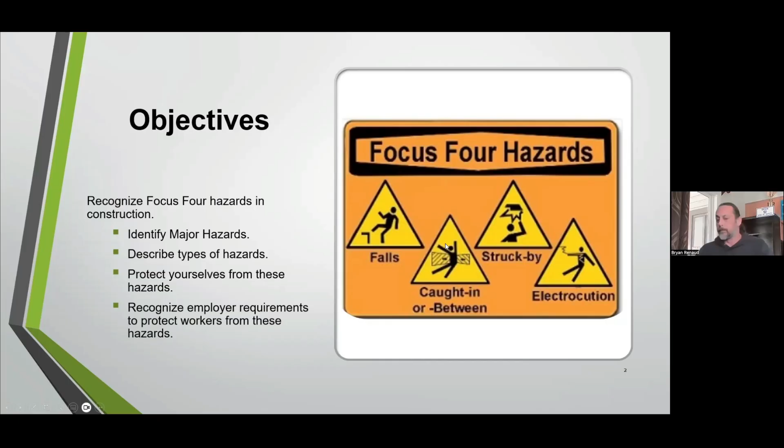Quite frankly, we have these things called emphasis programs that we try to connect to the industry in regard to these major hazards. And we got 1, 2, 3, 4. Okay, at least we got fives. 6 out of 30, guys driving. That's cool.

To address these, and it's interesting because we've been working on this Stop Falls Save Lives since 2012 across the nation. You would imagine that with over a decade of hammering the message, you might have some significant impact on that hazard or condition.

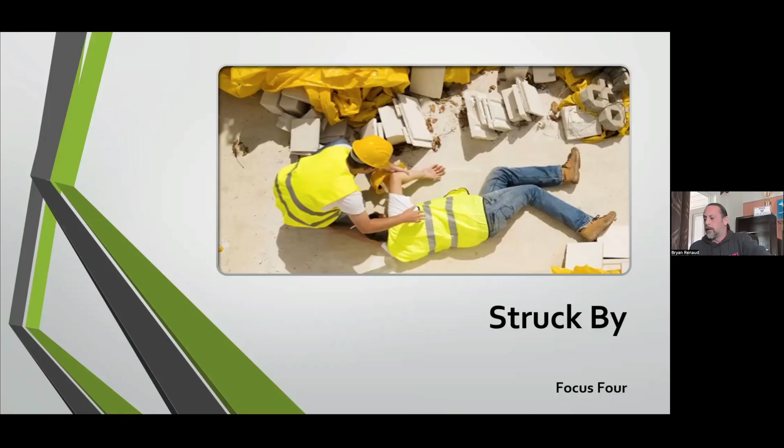To that note - no, we'll get to it when we get to the fall protection, because the way this presentation is set up, we're going to deal with each one of the Focus Four separately and kind of illuminate the hazards specifically, some of the regulations that are behind it as well.

Generally speaking, as I was saying, what is this? This is struck by? Again, being so difficult sometimes to discern. Struck by collapsing product, equipment, or materials - whether we want to call it struck by or whether we want to call it crushed by.

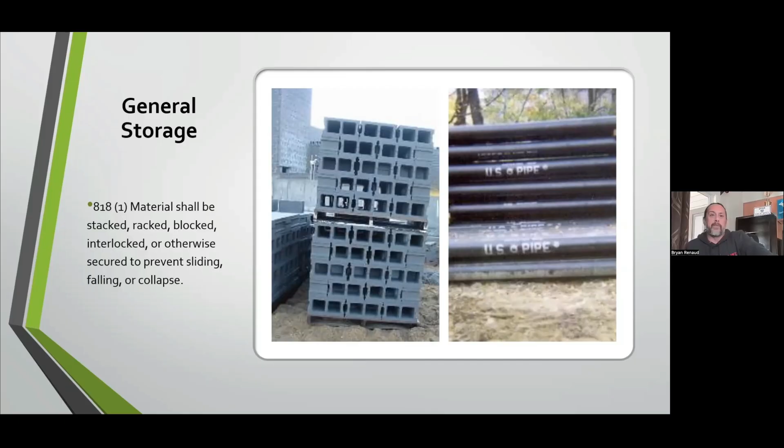Some fact is we have rules that talk somewhat ambiguously, unfortunately. Some of these rules talk about how do you properly store some of these materials. It says stack, rack - whether it be pipe, whether it be block or brick material. Typically, as a rule of thumb, it's a lot more specific depending upon how the material is stacked, and then literally how it's banded and/or stacked.

That's not me, is it? No, it's not, it's Neil. I'll put him on mute. Could be me. Oh yeah, that's you.

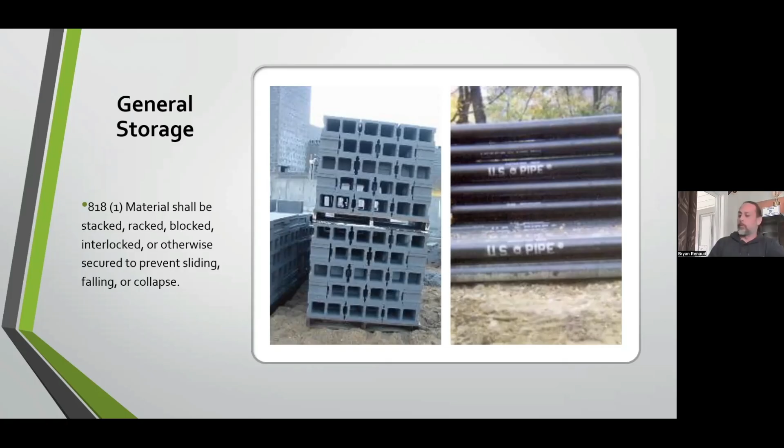So, struck by lightning, what is that? I don't get that. It's a joke, I don't know. Whether they be banded by plastic wrap and such like that. Rule of thumb: two pallets high, no higher.

Rigging equipment, slings, this variety. We're talking about rigging equipment, whether it be in this case nylon slings. Got to inspect them, defective rigging. This is the way it speaks about it in the standard. However, the manufacturer is going to have a lot more information depending on the type of sling as to what causes things to become defective.

Sometimes we do have certain specificities, particularly in our wire rope slings, about how many wires per strand are allowable to be broken, and how many concurrently, as well as in a lay. A lay being the distance in a wire rope that it takes for one of the strands to get all the way around, as that's how wire rope is configured, in a kind of corkscrew configuration. But some of the things we're looking for, particularly with the nylon or fabric slings...

...would be, first off, that it be marked with its rated capacity. I see that there is a tag, and certainly you could probably contact the manufacturer and get a new tag and sew it or glue it. Or, I wouldn't really prefer gluing, I wouldn't really prefer getting another tag. I mean, if the tag is shot, your sling's probably shot, regardless of what, technically. And I know it's easy for me to spend somebody else's money, but...

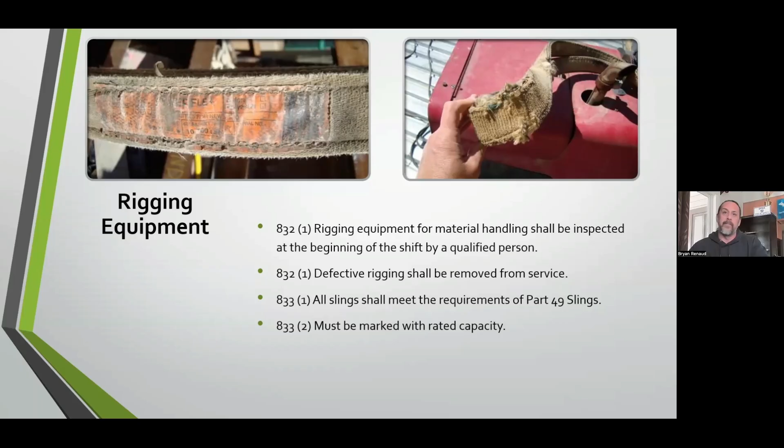Some of the fraying damage along the edges, and in this case particularly in the eyelet - well, it's all working pieces of a sling, but certainly the portion that's going to be under great strength or stress. Again, the entirety of this sling, but eyelets along the edges are things that concern me. What a great photo to just kind of insert in there.

Other circumstances of this, just locally and sometimes not so obviously, as far as being in the, what do they call it, line of fire - often a type of accident or incident where the release of stored energies, potential energies become kinetic energies. That is ultimately what lockout tagout is about in all of its various forms: electrical, hydraulic, pneumatic, gravity, things of this nature.

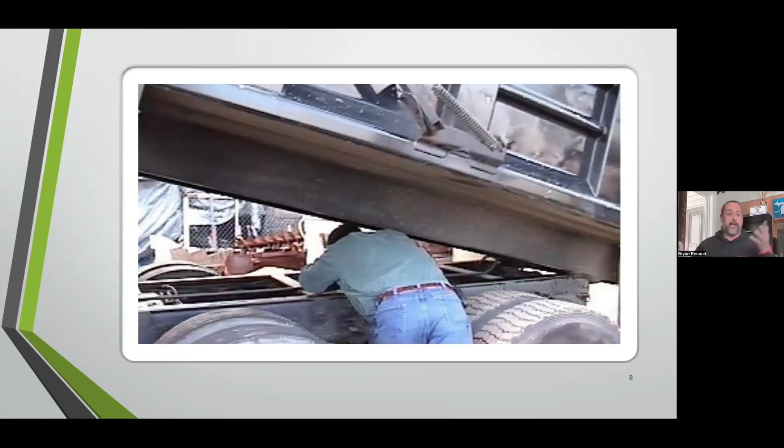I don't want to call them non-conventional, but usually conventionally when we're talking about lockout tagout, at least myself being an electrician by trade, I think about electricity often, not so much just the standard release of energies in all of their varieties.

Cab glass, you've got to be able to see out of them. Amazingly enough, there's no obligation to even have any. So I'm not trying to promote people just knocking the glass out when there becomes a crack or anything like that. If you do have glass, it must be the safety glass variety. From my understanding, that means it's not going to shatter, just like your windshield.

But certainly in demolition activities and things like that, you may not have glass. There might be bars or other kinds of protecting devices for the operator of a cab, and that is adequate. But certainly, if you can't see out of it... which brings me to another discussion really when it comes to struck-bys.

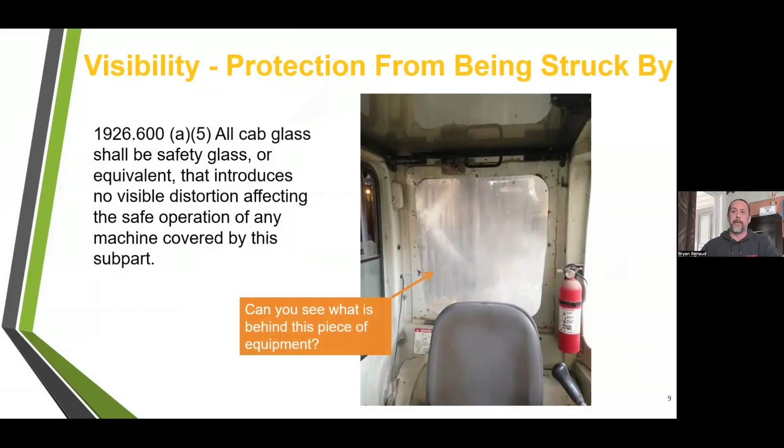We don't have any regulations that require that, but since we're just talking safety here today, let me just remind myself a little bit about, oh yeah, because we have rules that talk about vehicles that have restricted view, restricted view to the rear of the equipment.

That's every piece of equipment, including your car, minivan, or whatever. Everything's got restricted view. You're supposed to have a backup beeper that's audible above the ambient noise, or something to this effect.

Man, I don't know, that might be like 1940s technology or something. And I'm not saying just because it's all we've got to get rid of it, but I think we could probably do a little bit better.

Similarly with hard hats - I'll wait until fall protection to tell that tale, but think about it. When do we start using hard hats? Building the Hoover Dam, rocks are falling down onto people, and they had hats designed to keep them from the radiation of the sun working in the desert on this project. They kept getting hit in the head, so they dipped them in tar to make them hard. Now they're a hard hat. We're still using the same basic technology that was being used.

I don't know what year it was. When was Hoover Dam built? 1928, 1932, I'm not sure.

Yeah, we get really focused on convention. And it's interesting - the older we get, the more firm we get in our convention. Isn't it funny? Oh, I thought that was reading my words - I was speaking here for a second and it came up on this PowerPoint. That's a little odd.

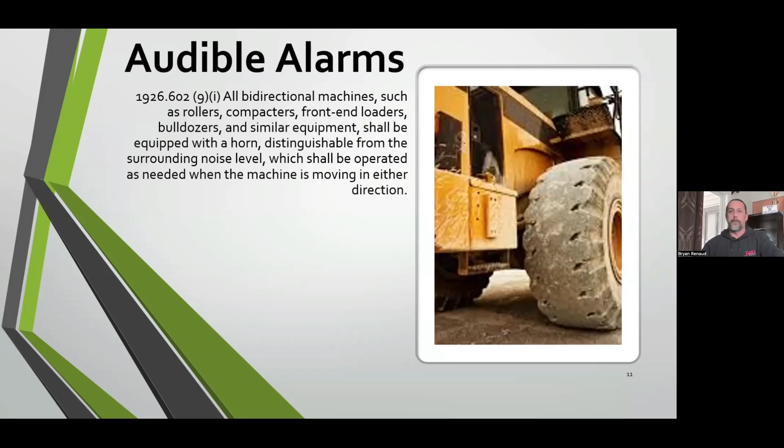Huh, interesting. Don't often see that done. My enforcement officers probably should be citing that a little bit more, but literally, maybe I should be teaching about it a little bit harder, because it's not often emphasized, I'm going to tell you that. Maybe for a roller it is somewhat conventional.

But it's talking about all bidirectional machines. It's actually dawning on me - equipment which has obstructed view to the rear shan't be used in reverse gear unless the equipment has a reverse signal alarm, distinguishable, the beep beep beep. 1940s technology. There's no mandate or obligation to put backup cameras on equipment, retrofit or otherwise.

I know a lot of new equipment does come with it. I was doing an excavation class at CAM, over in Woodward, Bloomfield Hills, which coincidentally is apparently the oldest construction organization in the nation. Doing a class down there, there was a bunch of guys from a company called Sterling Excavating or something up in East Tawas. I came all the way down to Bloomfield Hills for this class, and there was like 6 or 7 of them.

Anyway, I kind of get on little crusades, and one of them is this. The reason I became on this crusade was because I ended up buying a new truck - it wasn't new, just new to me. It was a 2017 and it had a backup camera in it. I never had a backup camera in any of my vehicles before, and I've been driving trucks my whole life, so it's not like that was anything new.

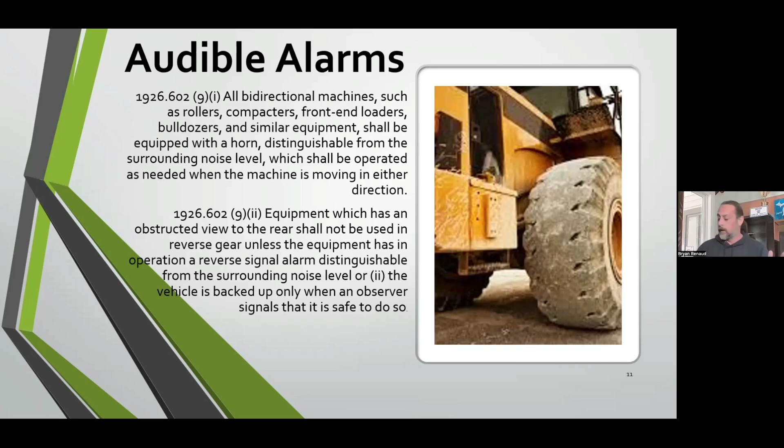And honestly, it is quiet. But if anyone has any relevant story or add-on or something, please share. It really makes it feel a whole lot more real to me if you do that. It's not like we've got 3 hours. I talk fast, you already noticed that.

Traffic control devices have to be installed just like the Michigan Manual on Uniform Traffic Control Devices requires. Part 6 is the temporary traffic control section. The Michigan Manual has many parts, at least 6 of them, and all those other parts deal with the normal building of roads as far as lines, spacing, distances and everything. Part 6 is the temporary traffic control section.

They're not going to deviate a lot from the normal types, and that's generally the rule. Temporary traffic control should resemble normal traffic patterns. In fact, the Michigan Manual on Uniform Traffic Control Devices is really just advice and guidance for a qualified person devising, creating, or planning the temporary traffic control plan, because no two road situations are the same. So you can only get so much out of a book. It can only provide suggestions and guidance for certain circumstances, locations, and situations. So it's not really the easiest document to regulate.

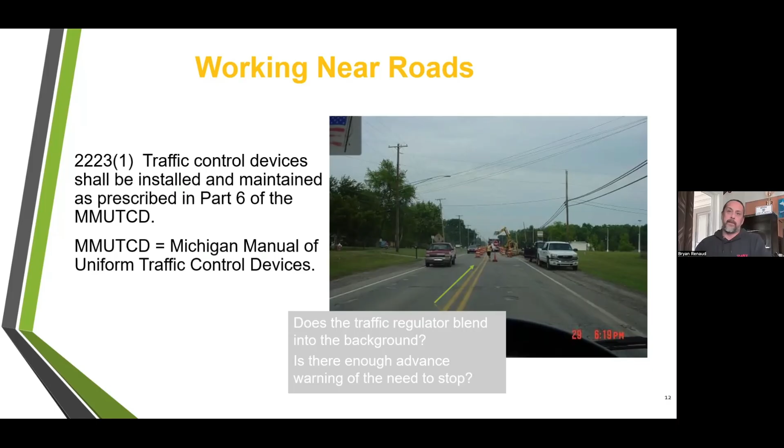I hope somebody out there is laughing, because some of these are pretty bad jokes. But other ways we can get struck by, or quite frankly, it's almost like we should just do the fatal three, because crushed by, struck by, and caught between seem to get all muddled up, to be honest with you.

This I'd really call it more of being a crushed by. I mean, it depends, I suppose. If you're crushed between the moving counterweight and a fixed object, that's pretty crushed by. If you get struck by the moving counterweight, that's just being struck by it. Now usually I wouldn't think that's going to kill you, but we're in the fatal four and we're talking about struck by still. Anyway, it talks about how if anybody can be struck by the rotating superstructure or counterweight, the hazardous area is going to be barricaded.

But how many times have you seen what's going on in the picture? All the time. What do you mean barricaded? Well, there's a number of different ways you can barricade it.

You could actually put sawhorse style barricades all the way around the area so that nobody can go in the area, and that's got to encompass the whole entire area, the moving superstructure, the counterweight.

Or I've seen it also done where, for instance, on the bottom picture here, you might have little couplings welded to the side of the tracks, one in the front, one in the back, on the left side, one in the front, one in the back, on the right side, but welded on a bit of a diagonal, so you can stick PVC pipe in there, and then you cut the PVC pipe to the radius of the counterweight, and then it's a moving barricade around your machine.

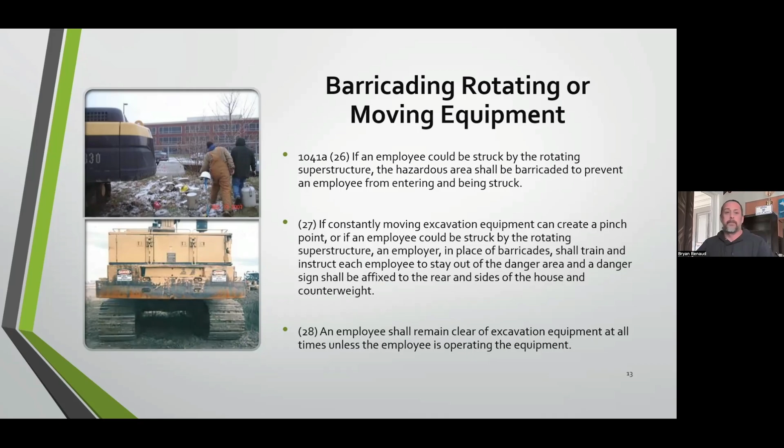Cool. It's another one that I'd like to chalk up to getting crushed by, because I mean, if a masonry wall falls on you, I guess it struck you, but it kind of crushed you too. Again, I don't know, my English skills are weak. Don't know exactly how this works, but for walls, interesting.

We're the only state, well, I shouldn't say that, we're the only state to have a comprehensive standard on masonry wall bracing. The Fed standard, it's not in this PowerPoint here because we're not doing a masonry wall bracing presentation, but the Fed standard basically says you've got to make sure walls don't fall down. But it doesn't go comprehensively as to creating a restricted zone, having a person assigned to be able to take the wind measurements, having all of the required documents that we require, almost like a hazard communication, MSDSs and such like that.

We almost require a similar type of communication for the temporary wall bracing technique, because temporary wall bracing may look like what you see in the picture here. Conventionally, that's the way you're going to see it, everybody's seen the 2x10s in a triangle. We do have the opportunity to restrict that in our standard, holding you to the design of that temporary bracing. But it has incredible limitations, and because of that we usually build taller walls than are capable of being braced appropriately with our wooden type of braces. So these hog legs or other wall bracing systems, with manufacturer limitations, are generally more conventional because the walls are just taller than those 16-foot long planks are able to properly hold up or brace.

The hazards associated with masonry walls, let me back up, are that you don't know anything by looking at a masonry wall. That's what you learn by the end of the training, the full day or half day training it actually consumes. You learn that you just don't know anything.

So on a job site with masonry walls, whether they have braces or not, if they're subjected to wind and you haven't reached final lateral stability or the building's not done, you better go to the general contractor and say, I've had the training, and I know I need to find the temporary bracing scheme, because I need to know where the hazardous walls are on this job site.

Also, in that report or whatever he provides, it'll tell you how that wall is going to be built, with the on-centers of the rebar. Now, I'm not asking anybody to take a ball peen hammer and start knocking holes in the wall to verify that, but that type of information has to be available on the job site.

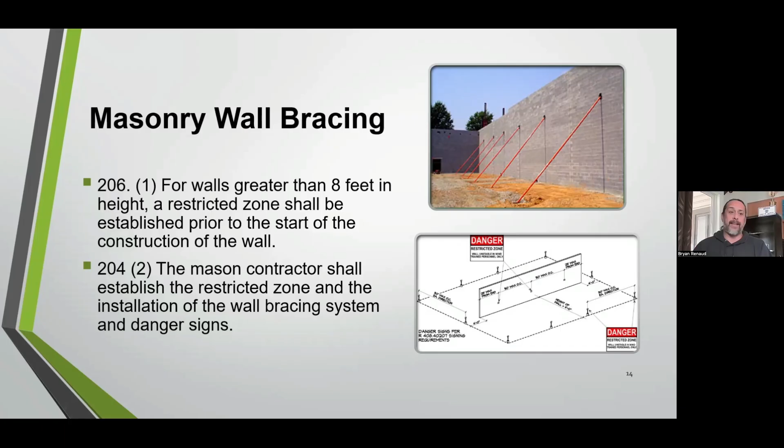Somebody also has to be taking wind measurements, because these braces are only good for up to 40 miles an hour. That means you have to evacuate the area, the size of the wall plus 4 feet, at 35 miles an hour after 24 hours. In the first 24 hours, you've got to get out at 20 miles an hour, because the wall is still green and can't support anything.

So, any questions on that?

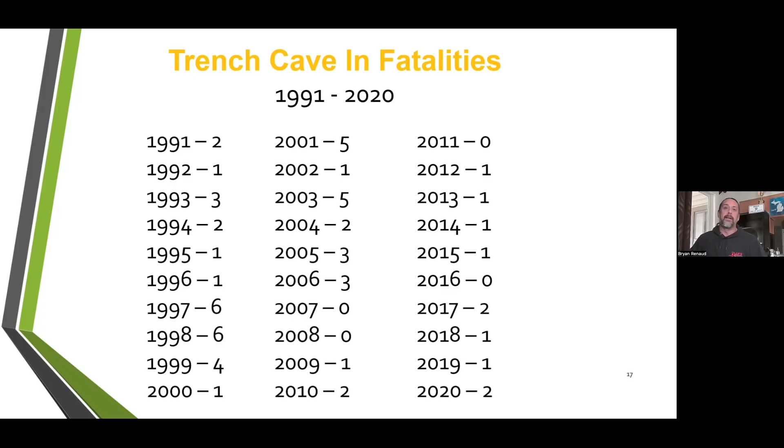So whether it be people doing a little bit more with a little bit less in 2003, or the wet winter of 2002 to 2003, just getting across a couple of points of how these accidents happen, and certainly water's impact on excavations. It's a real good picture here, I really enjoy this one because it's pretty much got everything.

And so therefore we can kind of cover all the requirements of excavating in one picture.

At 4 foot in depth, we have to have some acceptable means of access for this guy. It's got to be a ladder, usually in a trench, because you're not going to have a ramp in a trench. Sometimes people say, what about the backfill, I'm going to backfill in my trench? No, you can't use the backfill. First off, it's got to be stable. So you compact it. Well, okay, but the walls of the ramp are vertical and thus out of compliance. Anytime you have a ramp, the walls of the ramp also have to be appropriately sloped, self-supporting, or otherwise supported, whether it be by sheet piling or something. But yeah, he's got no access here at 4 foot. That's what you need at 4 foot in depth. You got to do that.

Now, I also had a guy one time say to me, respectfully sir, when he's in the bucket, ain't he protected? I said, well, I see you thinking there, but no, that's not acceptable. He's not protected while he's in the bucket. So that's that 4 foot in depth.

The other thing about that ladder is it's got to be close enough to the work. We say within 25 foot of the workers. That seems reasonable, but sometimes you have longer trenches, especially out west, where you have a whole lot more universal type soils, and you might have these trenches open for a very long period of time. You can't do that in Michigan. First off, too much rain. Second off, the soil is just not nearly consistently clay enough to be able to do something like that. So quite honestly, it's kind of difficult to have a trench greater than 50 feet, where if you put the ladder in the middle, it's not greater than 25 feet from the workers.

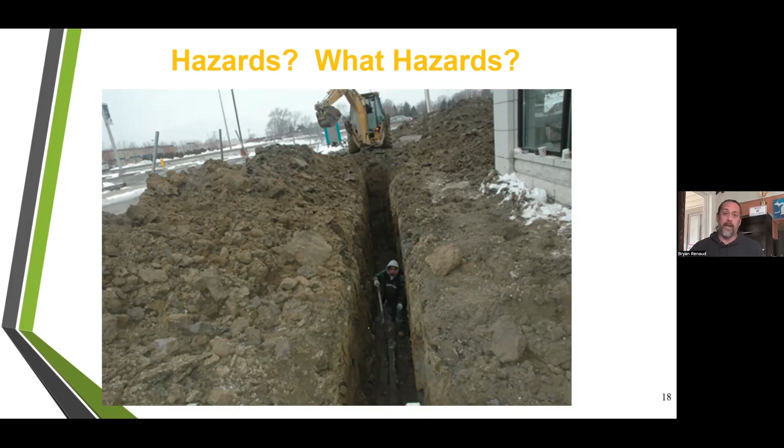This is why we need these support structures to be done by a qualified person. This is why I also recommend that you keep it simple if you're going to do sloping and go one-to-one. Try not to get too tricky. You'll see how you can get a little bit tricky here with our rules.

But dirt is heavy, and much more heavy is the water that may be in the voids that is typically in the soil. Because typically soil is about half substrate, half void.

And some of you may have this experience. Maybe you're doing some landscaping work around the house. You go to Dale's Landscaping and you get a half a yard in the back of your pickup truck of whatever it is. Let's just say dirt, sand, whatever it may be. And you get working on it. It's midday Saturday, and then the boys come over and it's like, hey man, you going to watch that game with us or what? And then you're like, yeah, but I got to finish this. And then, of course, it rains on Saturday evening, right? And you go out to the truck on Sunday morning and your springs are all shot. Yeah, water's heavy.

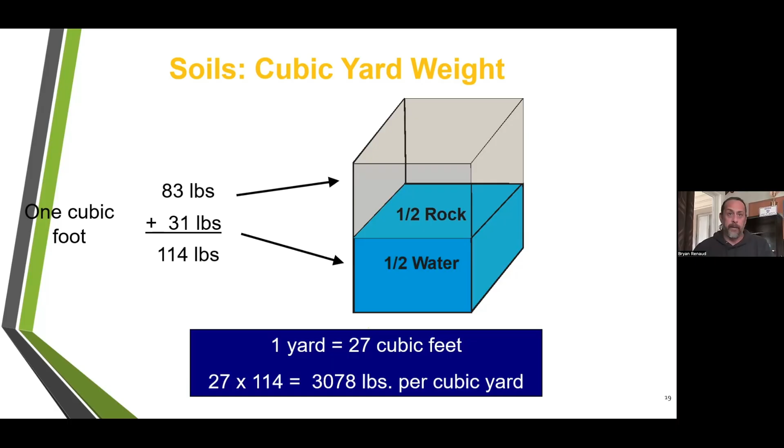Here's some of the science if you want to know. Obviously, substrate has a lot to do with the weight of the soils, of course. Fact is, it's heavy. So we do require that an ongoing inspection be accomplished by a competent person.

Okay, what is this? It says qualified person clearly on the slide here. Well, was it last year? I think it was last year. Might have been the year before that, which would have been like '24, which would have probably preceded the actual development of this class. But it was recently where we fell in line a little bit more with federal OSHA vernacular, if you will.

Now, our expectation of what are the obligations of this person to do this ongoing inspection, they haven't changed whatsoever. It's just that we probably shouldn't have been using the word qualified person. We probably really should have been using the word competent person, because just as a general nature, what's a competent person?

Sometimes it's easier to define competency by saying what an incompetent person is. An incompetent person is someone you can give all the training, instruction, equipment, tools, and materials to, so there's really nothing standing in the way of them accomplishing a task. You ask them to do the task, and you really have no idea what's going to happen. They can't follow instructions - that's incompetency, as opposed to complete insubordination.

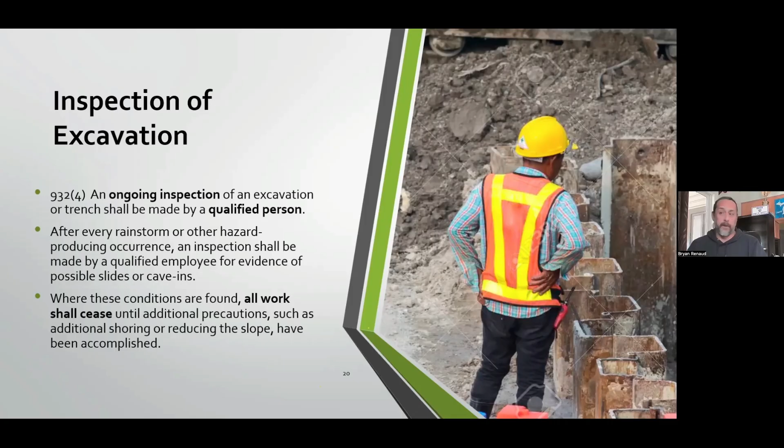Anytime you find conditions that are going to compromise your excavation, all work's got to cease until proper protections are put back in. That may not be up to the competent person to determine - they might have to go to somebody capable to design something. They're like, well, I recognize the hazard, but I just don't know how to fix it. So again, competent people follow directions. Qualified people are the answer, folks - if I got a question, they better have the answers. They're the designer.

Here's some more words about what this means. A qualified person is someone who, whether by professional recognition or extensive knowledge, is successfully able to demonstrate their ability to solve and resolve problems related to the subject matter of the work. Again, this typically means designers. Competency has the authority and/or ability to follow directions.

You're going to have to get your hands dirty or use some sort of empirical testing device to get a true sense of what the substrate really is, pertaining to its unconfined compressive strength. That's what we're really worried about - how much does it cohese together? The more it coheses together, the more straight up and down we can dig this thing. Granular soils, at best, 45 degrees.

As you can see, it naturally lays at about a 45-degree angle - it's only using friction in order to stay together. Soils that are finer in texture, like clay, actually use a lot of hydrostatic tension to stick together. The best example of how clay is cohesive - you ever get two laminated pieces of paper and put one little drop of water on it, then put them together? You're not going to pull them apart, you got to slide them apart. Same thing happens with clay.

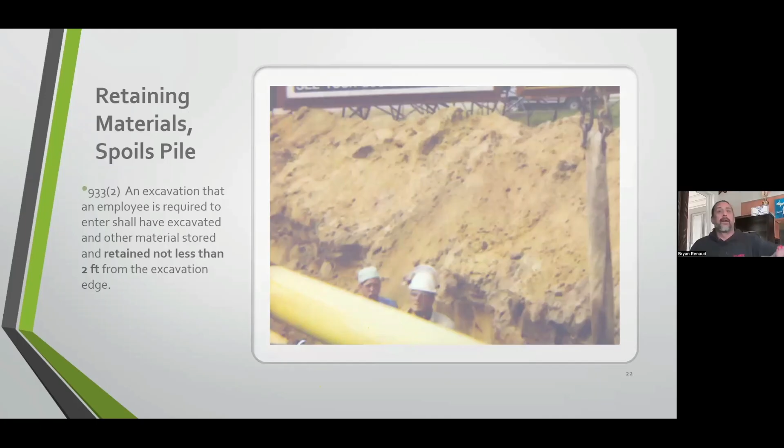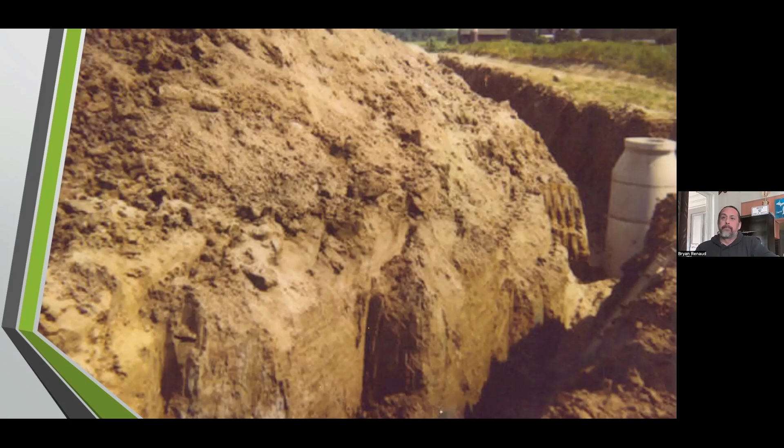Here's another example of the spoils pile being right there at the edge. Again, taking a probably 10-foot deep excavation and making it like 18 feet deep. It's amazing that it's even standing up.

Whenever we have an excavation greater than 4-foot depth, that is quite a beautiful excavation there, isn't it? I want to make mention of it after I read this rule: at 4 foot in depth, you've got to have a ladder or another method of access and egress. But a ladder shall extend at least 3 foot above the top so you've got that handhold.

Now, why was I just fascinated here with that excavation? Well, you know, they got their protractors out, right? If I were to guess, I'm going to guess somewhere between 65 and 70 degrees. What do you think? 65, 70 degrees? Probably closer to 70. You know, that's probably not actually the type of angle that we would be needing, just to let you know.

Well, heck, why don't we just count the ladder rungs? 1, 2, 3, 4, and then it's like half for that bottom rung. So that's like 4.5 feet deep, and that's why they got the ladder in there. So technically speaking, they wouldn't need to have some sort of slope on that excavation until they get to 5 foot in depth. But if they did get to 5 foot in depth, let's just call it - it's definitely got granular soils in it. It's definitely got sand in it.

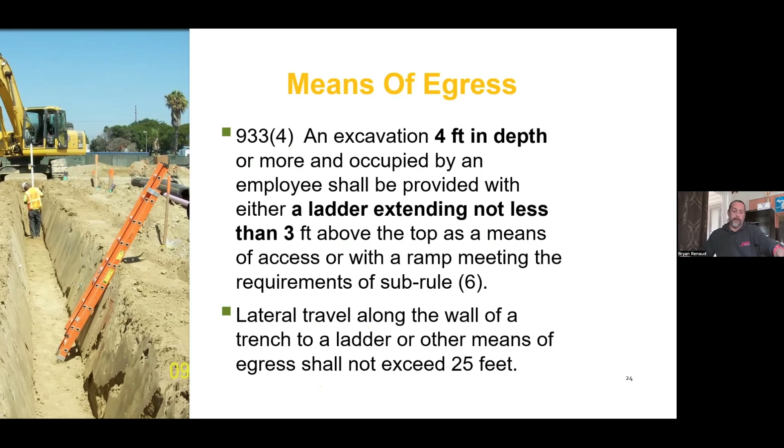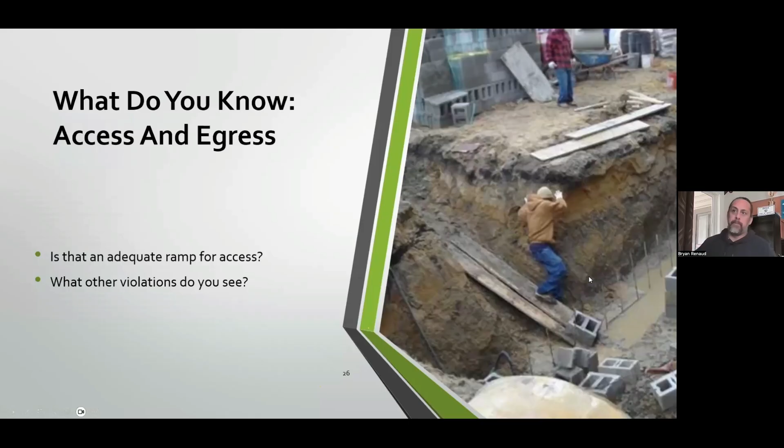But then, yes, the slope - the ramp that they're using to access egress out of here is not sloped appropriately. And certainly it's not provided with a slope or protection vertically, let alone the fact that it's like Vlad the Impaler here. Certainly, if they're the Masons and getting to go start placing their block in there, you can remove those impalement protective caps. But I still would recommend you probably move that locational ladder.

Here's a nice cross section of some of the elements that we're talking about here. In this case, we have what looks like about 10 foot deep, 10 foot wide at the base. That's a big excavation. It's got this 2 foot delineating, I guess, the distance and where the spoils pile would be able to be begun to be placed. Again, recognizing that the spoils pile is going to, as it gets taller, get wider. So you don't want to double handle this stuff. Again, trying to get it the heck out of there is always best.

Sloping is such a difficult proposition. Such a difficult proposition. All this space.

7.5, 10. What kind of angle is that? Anybody really good with their math? I got my Pythagorean theorem here. Hold on a second - A squared, B squared, C squared. And then I got to find the tangent of... Somebody do that while I talk, okay? No, I'm just kidding. I don't think anybody's going to do it. Anyway, but...

Excavation less than 5 foot in depth shall also be protected when the examination of the ground indicates hazardous earth movement may be expected. I guess that would be what I would rest my laurels on with my 4 foot 11-inch deep hole that I experienced over there in Fox Hill and Mound Road.

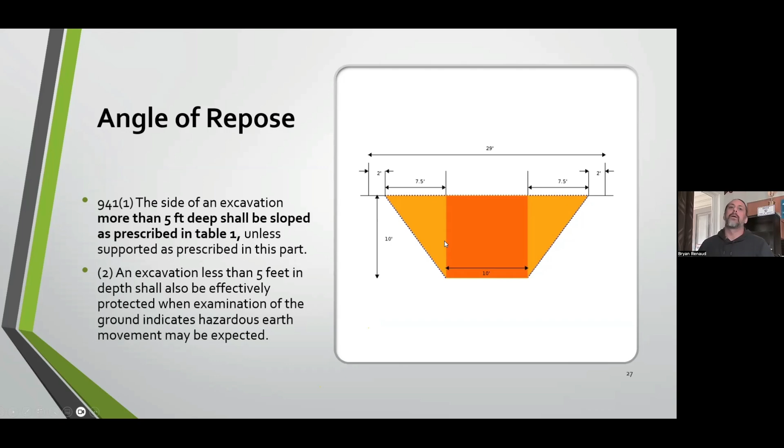Here's one for all you guys falling asleep. This is the angle at which we're looking at. And as I was saying, firm clay gets you 56.

For crying out loud, I have not seen too many crews with a protractor on site. So how about we just... my mom always told me, if you put half the effort into doing what I asked into making excuses, it'd be done by now. How much time and money is wasted making all these excuses? Just cut everything off at a 1-to-1 angle, 1-to-1 ratio, 45-degree angle. Inevitably, as long as we're in an urban area, we're going to be dealing with some sort of fill. And unless you can get me the data on that engineered backfill, we're going to have to call it fill, and that's 45 degrees. So that's it. That's facts.

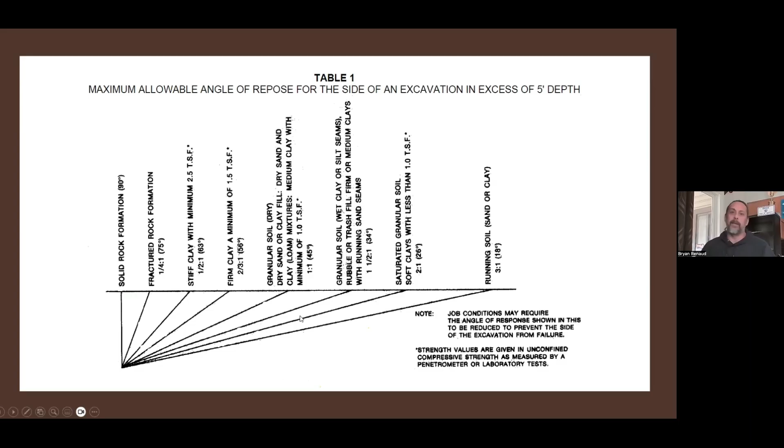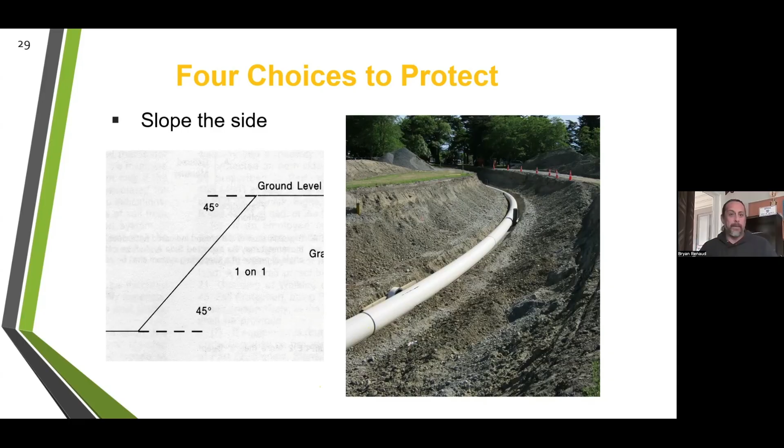And the other thing too, come on, we're not really going to slope now, are we? Unless we're in a big open field where there's nothing anywhere—no other utilities running perpendicular or adjacent, no streets, nobody's yards, no trees, all wide open. I mean, it's looking great, but how often do you have this opportunity? Let's be real, sloping isn't always practical—unless you've got a giant machine and you're working out there at M59 and M23 by Hartland.

I think this is the Meijer or whatever at that intersection. Yeah, oh by the way, this is not the appropriate way to slope or bench. Pardon me.

Because when we bench, we have to replicate the angle of slope we're supposed to achieve based on our soil type. If you measure an excavation, you measure it from the toe where the bottom intersects the wall, to where the wall intersects grade. And that's right here, right below the G—that's the angle that's supposed to be achieved.

Now if we were to bench it the way the dotted lines show, then I'd have to measure it from the bottom to here, and that's not even close to being the same angle. That's got to be damn near a 70-degree angle right there.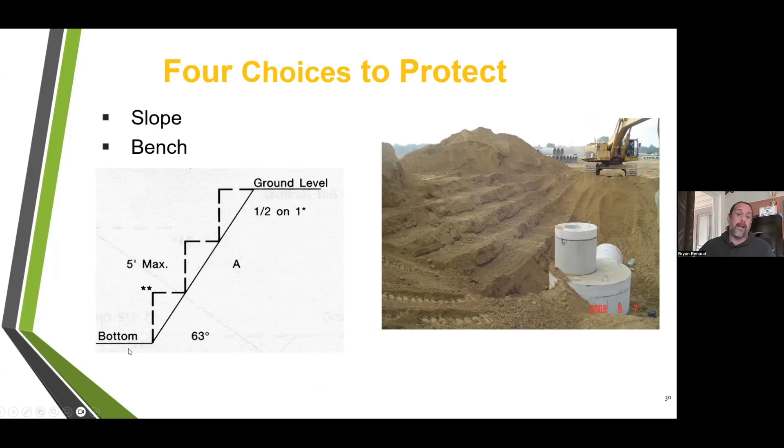So unfortunately we do have a bad illustration in our standard, which is referenced here. But you've got to double back that first bench, and the bench itself cannot create a trench—kind of nice that it rhymes. So it can't be more than 5 foot, because at 5 foot we have to provide protection. Your benches can't be more than 5 foot, that's for certain. And also, the double asterisk at the bottom of the table in the standard says it cannot be taller than your excavation is wide at the base. Can't create a trench when you bench.

And this is very unfortunate, because as they may try, they're still way out of compliance. They've got, I don't know, a 2-foot pipe, 30-inch pipe, so that means we're let's say 36, 42 inches wide. Then we have our first bench—well, unless he's a little person, is that right? I'm not trying to be insulting, but yeah, this bench is like 5 foot tall, at least.

And again, you can see all the variety of substrate. It's almost impossible to get an appropriate and consistent benching profile or sloping profile in the variety of substrates. So let's get to things that actually work, not just theoretically.

Now I say that, and I know a lot of excavators probably want to come fight me when I say that, because they're like, oh I could do this sloping, blah blah blah, our work, blah blah blah. Okay fine, fine, but let's just be real. I'm an electrician turned safety officer, and I see tons of these excavations not cut properly. The only thing I can figure is, well first off, it's a lot faster if you don't slope it out properly. But secondarily, with all the things I bring up, it just doesn't seem to make a whole lot of practical sense, because real estate's real estate.

Anyway, here's some shoring systems that are put in place, sometimes depending on the longevity of the excavation, maybe the substrate. Again, I'm not the qualified person to design these shoring systems, so you have to defer to the manufacturer's guidance documents as to whether or not you need to put these dispersion, weight distribution things in place, or whether or not you can go just... I almost said something bad, but raw.

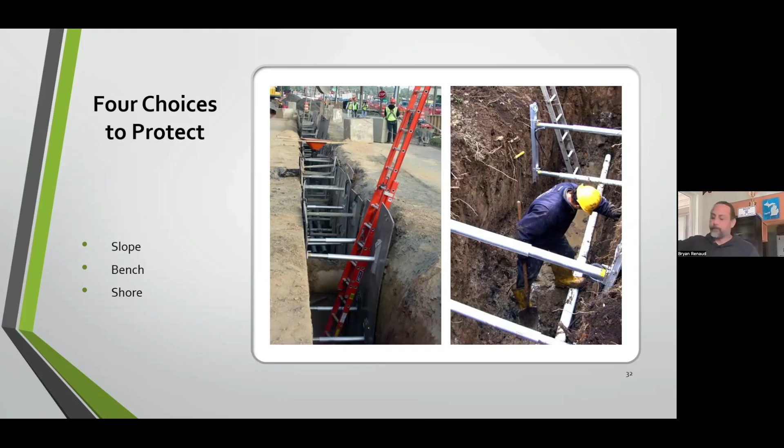You go to other parts of the country, depending on the soil types, like Arizona, they don't know what the heck you're talking about with a trench box. They use sheet piling, sheeting and stuff sometimes when the excavation is going to be vertical for a long time. But otherwise, they figure out what kind of soils they're going to have, and then they might actually slope it because it's consistent, uniform, and unchanging.

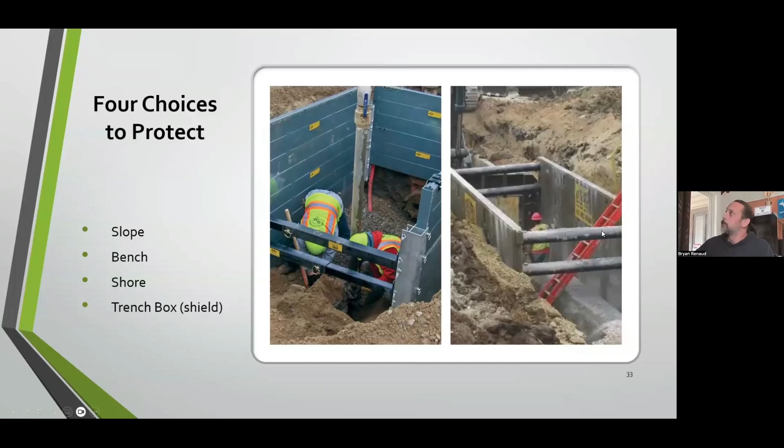So take some pride in the fact that we've got some pretty ingenious technology here when it comes to excavations. I know I've gone through my break here, but I just want to complete a little bit of this before I move on, so at the end of this excavation section, if you don't mind - you might be gone anyway.

Support systems have got to be designed by a qualified person. Doesn't have to be a person that works for the same company, for crying out loud - I don't know how they were remiss and allowed a word like 'employee' to enter this reg. But design of the support system's got to be maintained.

This is some tabulated data for, I don't know, the 6H series of shield walls for this manufacturer, whoever that may be, but it does list the depth of the types of soils. Interesting - what you'll find is most of these manufacturers, even though this is a very Michigan-centric product, do use federal vernacular for the types of soils they provide protection to. Remember that table I showed you, that you'd be well off to see if you were laying your head on the table, because it had like 7 different angles you could conform your angle of repose to?

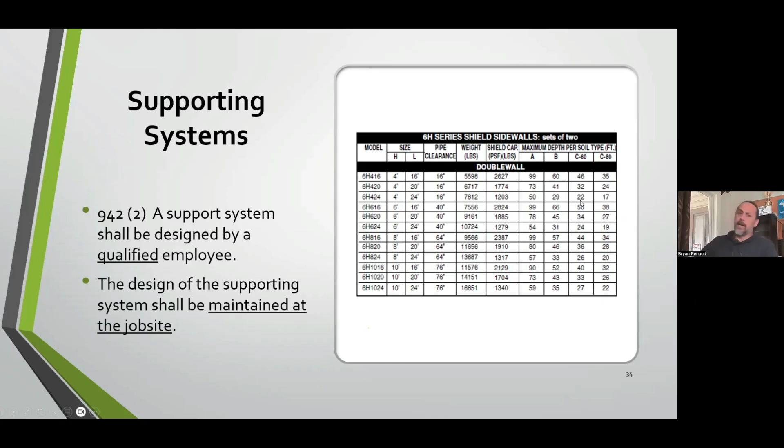Well, federally, they only have A, B, and C, and they say A doesn't exist, so there's really just B and C, and B's got to be cut at a 45-degree angle. They really make it easy. I like that because, like I said, I don't see too many crews running around with protractors.

First off, I'd like to see the design for this support system. It looks like the guy in the orange hard hat's a little skeptical too.

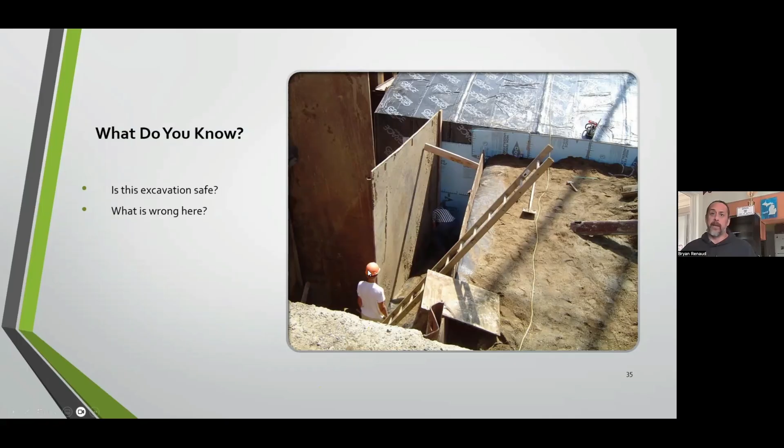Maintain 10 foot of clearance - can't go through an excavation topic without bringing that up. Why? And it wasn't a pun on the word 'up' - it's because excavators don't look up. Some of y'all might remember Isaiah Thomas reminding us all to look up once upon a time.

But yeah, maintain 10 foot of clearance. Simply, if you're having a rough time figuring it out and you don't want to stick your metal tape up there to make sure of it, stand underneath the power line, draw a line in the sand with your foot, then measure out 10 feet, draw another line, and that'll be your barrier. Now you can look at it with your machine.

Crane requirements do require that you visually depict or identify it - it doesn't say what. You could use cones, flags, or anything, but you have to delineate that 10-foot clearance from overhead power lines per the crane standard, which doesn't necessarily cover excavators and such.

So let's get on to electricity. How far do you got to be away from this stuff? Well, let me say, I guess first things first.

The best way to make electricity safe is to turn it off, right? So I want to talk about a couple of things fundamentally. Sure, we got rules and they speak about these concepts, but sometimes it's just understanding things as a whole. Number one, best way to make electricity safe is turn it off.

And the only way that it's ever going to be off is if it's grounded. Now, we're not necessarily talking about branch circuits, but overhead power lines, they're not off unless they're grounded. I bring that up because we're looking at a picture with things that appear to be overhead power lines. They're not off unless they're grounded.

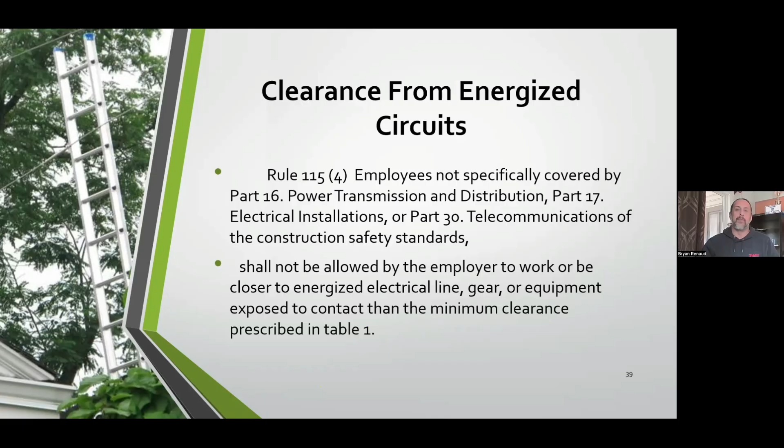I've looked at a couple of presentations in the last couple of days. I'm not so sure it has the information about this fatality I worked on over in the Edison corridor, where a gentleman ended up losing his life on a de-energized line because of the induced effects from the other side and the inappropriate grounding removal that they did. If we don't come across it soon, I'll tell that story anyway, now that I've teased it.

But turn it off. And if it's not grounded, it's not off. So simplicity is often what I'll tell the carpenters, because carpenters are using equipment all the time, whether it be getting the trusses with a little crane, or a fork truck picking stuff up and around, and they're not really electrically minded. They'll believe anything most of the time, especially if so, yeah, it's off. It's not off unless it's grounded.

The other thing is, pardon me, back up. Shouldn't press that button. Second, can't turn everything off. If you can't turn it off, stay away. How far? 10 feet. Now I often tell the guys this means use some sort of measuring device, because I've noticed that the male sensibility when it comes to length is a little off. So make sure you get the full 10 feet, guys.

If it's over 50,000 volts, I often say stay the hell away, man. It's over 50,000 volts. Just to put you at ease, most of the overhead power lines that you're going to experience in any kind of urban area are going to be far less than 50,000 volts. It's when you get out into the rural areas that we're going to start seeing very high voltages, where the second part of this table comes into play, whether it be the UP, or just any kind of rural area.

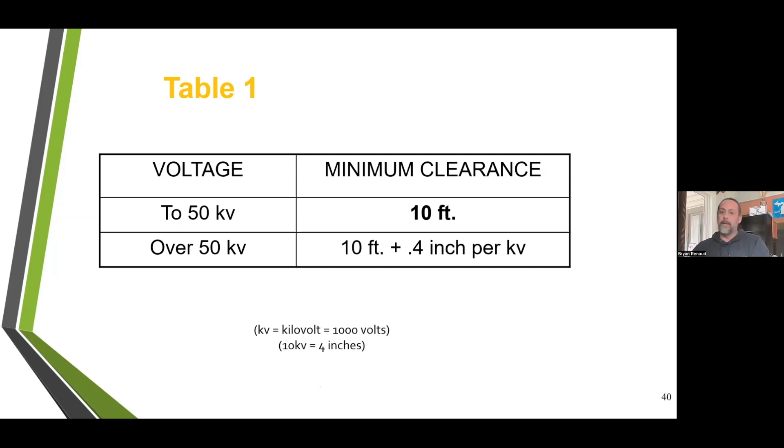We're not trying to create enemies out there, but we can mention these things. Also, you ought to use 12 gauge cords, period. With a 20 amp breaker plugged into a 20 amp receptacle, I know it's not a dedicated circuit, but you've got carpenters putting 13 tools on that one cord. If it's a 14 gauge cord, it's going to get hot. That doesn't mean it's going to fail immediately, but it compromises not just the insulation of those conductors, but the exterior. I know it's easy for me to spend your money, but 12 gauge cords are more durable.

It's not enforced, but it really ought to be, because all circuits have to be capable of withstanding or carrying the overload protection they're provided with. If you've got 20 amp breakers, that's a temporary branch circuit — that's the way we look at extension cords. So it has to live up to the same things a branch circuit would.

Just a simple bad idea example: sorry, I went on this whole GFCI thing, we're not even looking at GFCIs anymore. We're still talking about staying 10 feet away. If you're going to store things under power lines, I'd suggest you don't, but by law you can. If you add 10 feet plus the length of the material, most of your stock is 10 feet anyway, so I don't know how high you think these power lines are in the first place, but it's a bad idea.

I was just doing this class down at the Detroit Training Center with heavy equipment operator trainees, and I was talking to them about a fatality I worked on over in Romulus.

It was just up right by the airport. It was a recycling company, like a Dumpster-type thing, where the truck driver, a young kid, comes on the job site and says, 'Yo, I got your empty box here. Where do you want it? Because I'm picking up your full one.'

The superintendent, like most superintendents, got two phones to his ears. The guy's standing there waiting for him to talk, and he's like, 'Over there.' And he goes over there because there's nothing over there. The reason there's nothing there is because it's underneath power lines. But he's busy, he's not trying to hurt nobody, he just forgot.

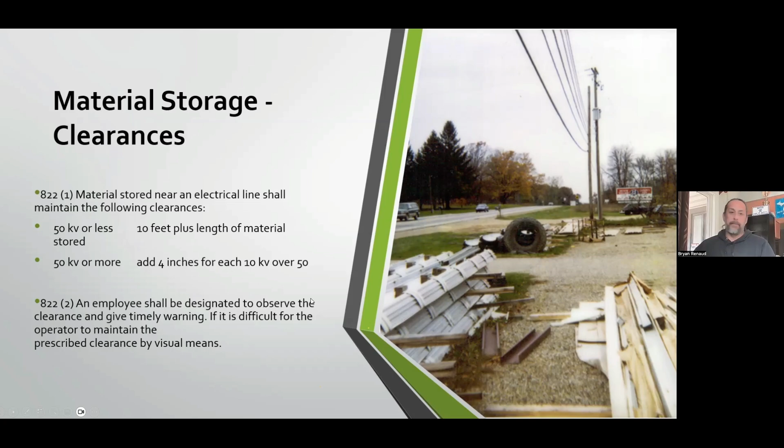Licensed electrician by the state of Michigan—I think it's actually an overstepping of OSHA jurisdiction. We shouldn't be. We're the only state that has a requirement that all installations have to be installed by a licensed electrician under the supervision of a licensed electrician.

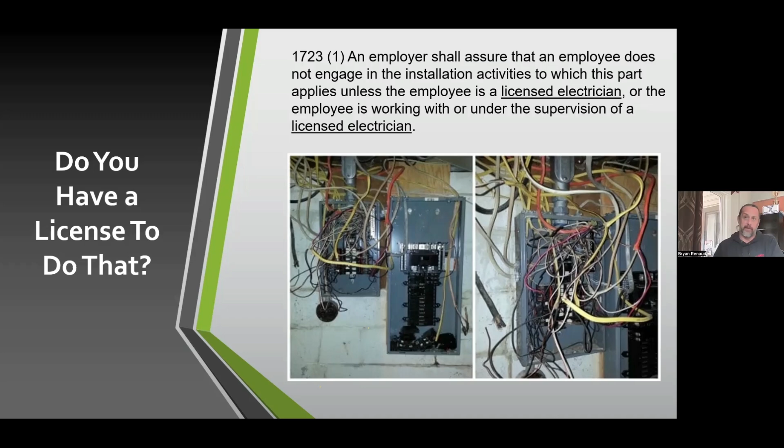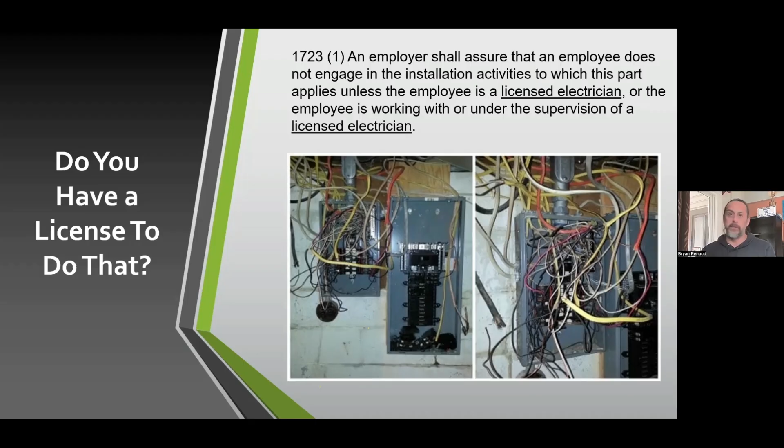Regardless, we do have a rule in the state of Michigan that does require this. Again though, what does it mean to be under the supervision of a licensed electrician? That's what I was alluding to with the journeyman to apprentice ratios, which, to be honest with you, is outside of our jurisdiction to enforce.

We have two rules that talk about all temporary power sources—this is not part of permanent building wiring—have to be GFCI. So extension cords have to be provided with GFCI protection, and there's various types of it.

We also have another rule that says anytime you're in a wet environment, you have to use GFCI as well. So if you're in the realm of construction, why are you wasting your time thinking about whether or not you need a GFCI? If it's needed every time you use an extension cord or you're in a wet environment, just use it 100% of the time. Otherwise you're just wasting time and money thinking about it.

I'm not trying to offend anybody, just waking you up if you're starting to doze, but I also say treat your GFCIs like you treat your underwear—use your own. You don't know what other people are doing with their GFCIs. As far as I know, painters are soaking their GFCIs in water at night. Don't they soak everything in water at night?

But this is the only device specifically designed to protect you against accidental contact with electricity. I think there should be a certain amount of intimacy with it. I can't require that, but I can emphasize it.

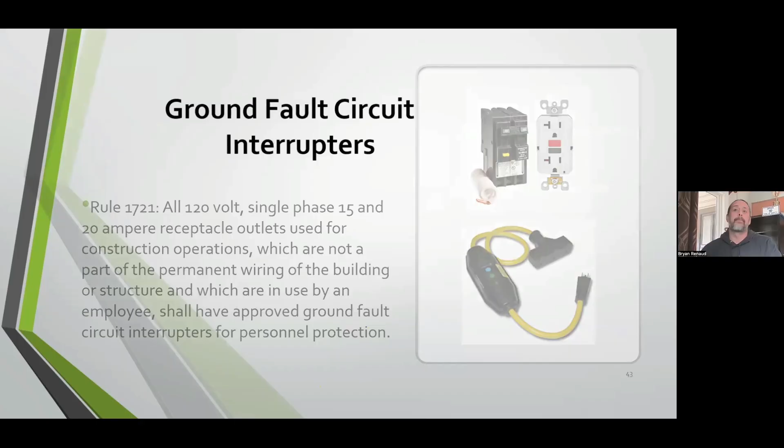This also does include some very large machines. The largest and most contentious application of this rule that I can think of is the block cutters or other masonry type saws that are electrically driven. Might be 240 volts, 50 amp, have a dedicated breaker, a little disconnect right above the station where that saw is being operated. Is it portable? Well, it's kind of stationary here. It's not, but those OSHA guys, they'll call it portable just to get you. And the fact is there is a GFCI - 240, 50 amp GFCI - about $300.

But there is still a hazard too. Just because, even if we're applying a portable denotation to something that could be successfully argued as stationary equipment and thus fall outside the rules, you use an electric piece of equipment with water and you're standing probably on the ground. I think there's a pretty reasonable explanation as to why a GFCI would still be a strong argument.

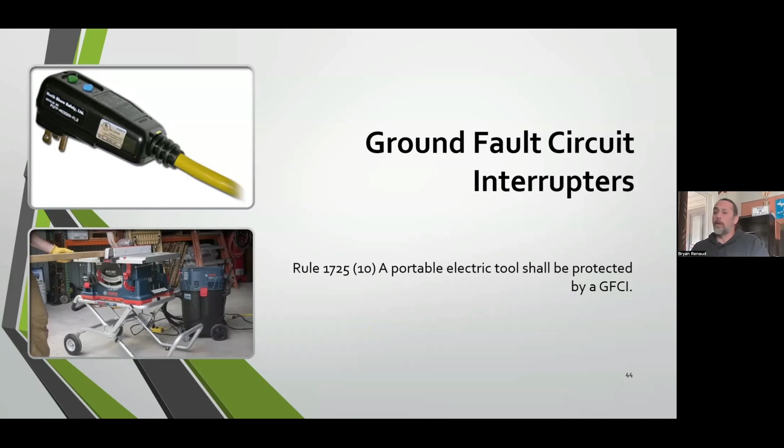Why is a GFCI a strong argument for cords, extension cords, as opposed to just plugging our extension cord into the permanent building wiring? Why do I need a GFCI when I use the extension cord? Because the extension cord is exposed to damage. It's out here. The wire in the wall is not likely to get damaged. We don't need GFCI for that, unless it's in a wet environment, of course - that's why you have it in bathrooms and kitchens.

The extension cord's got to be protected against damage, have a plug body that is designed to prevent strain to the terminals. What does that mean? Well, they didn't do this properly, because if they would have, there's a little gripper that keeps this from pulling on the wires that are put underneath the little screws attached to the prongs here. Right now, there's tension, strain being applied to those terminations. That's no good - that's why we have to have either a molded connection or a properly clamped, strain-relieved connection.

In a drill, sometimes you see that conical flex grip. It does a little bit of both - provides strain relief as well as a durable flex point. If you have a damaged cord, some people refer to this yellow portion as insulation - that's not insulation, it's flexible conduit, of a duty rating. What's duty rating? It means it can be exposed to a certain amount of physical contact. There's a variety of different duty ratings for this flexible conduit - it's just physical protection, like plastic. We have flexible plastic conduit, flexible metallic conduit, Schedule 40, Schedule 80 type plastic pipe. There's lots of different types used to protect, but it's not insulation, it's physical protection. Now that the insulation is exposed, what do we use for insulation? I know we don't use asbestos.

Anyway, we have a regulation that restricts exposure to voltages operating greater than 50 volts. Where the hell did they come up with that? I mean, the wall basically has got 120 - I know people call it 110, but it's got 120 in it. What other? Oh, batteries, right?

Like a 9-volt battery - anybody ever take a battery and stick it to their tongue? If you never did, then I would just suggest that you don't have a very good father. But that's pretty good, eh, Maurice?

Voltage again is pressure, and the reason you feel it in your tongue is because you don't have your leathery epidermis on your tongue. It's wet, it's thin, so it doesn't take a whole lot of pressure to get the electrons flowing across there, and you're getting enough to get some tingling sensation.

I've often been nervous when I go to the AutoZone and see all those car batteries. They're big, right? And it's like 12 volts. I'm thinking, can I touch both of those? Because I've dropped a wrench across a battery before. Anybody ever done that? You're like, holy smokes, I just was touching that. That's scary — well, it's only 12 volts.

Now, I'll ask anybody in here, has anybody ever stuck their tongue across that? Promise, you're in the wrong business if you are. Just saying — if you did, it's a bad joke. But that's a long way.

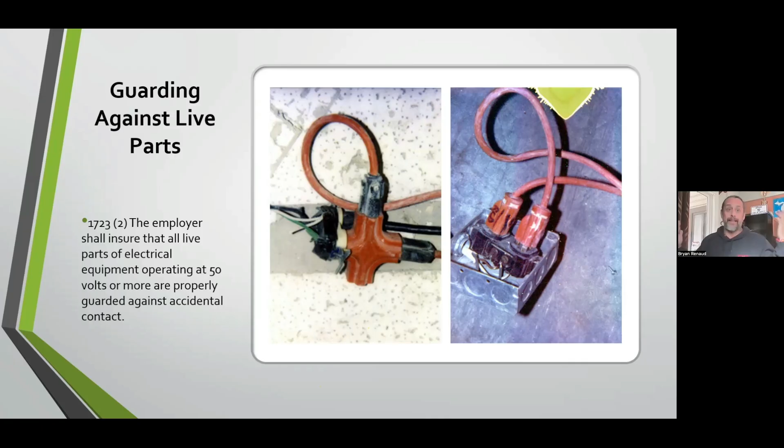It's the current that kills you. It's the voltage that overcomes your protection. That's why we use gloves and things better than just our dry skin. Greater than 50 volts — that's the threshold we're looking for.

Which does cause me to get concerned with this battery technology. I saw some sort of riding lawnmower running on batteries. I'm pretty sure that voltage has got to be getting up there to be able to do that kind of work, because work, or watts, is voltage times amps. Amps is determined by the size of the wire, and you can only get the wire about the size of your finger if you're pushing somebody around on a lawnmower. So that means the voltage also has to get way up there. So battery voltage has got to be getting to 60-something volts, which makes me start thinking about a cracked battery — let alone the chemical injuries and fire hazards present with batteries — just the sheer electrical hazard, because we're putting these cells in series and getting higher and higher voltages to perform an incredible amount of work.

Anyway, that's a story for another day, I guess.

But you got to guard your panels. How do you properly guard them? You got to have either the dead front, which is what you see in the front or right-hand side picture, or the entire cover. Often we don't put the entire cover on until you're ready to turn it over to the customer, because you don't want it all dinged up and painted on. So the dead front might take some abrasion, but it's durable — it's physically blocking access to the electrical parts. You can try to stick your fingers in behind there and get yourself hurt, but for all intents and purposes, that's a dead front.

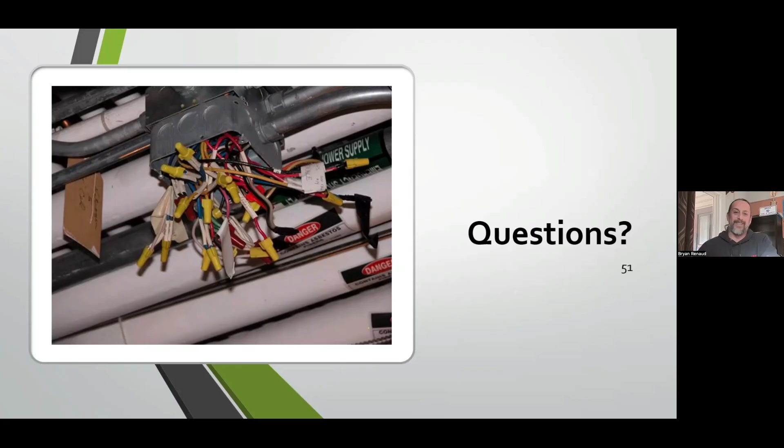One of the other things I wanted to mention—the same rule that requires us to provide signs for electrical installations employees could accidentally contact also applies a requirement to put signs underneath power lines, like with my Isaiah Thomas reference about the kids under the maple tree looking up. Having signs underneath power lines, because employees can accidentally contact them—that's not the plan, of course, but that's what an accident is, they don't call them on purpose. So even though there's not a specific rule that says put signs underneath overhead power lines, it says you have to identify with signs any electrical installations employees could come into contact with, which I'd say includes overhead power lines. It's funny how much accolade I got when I told a couple of my cohorts about that, and they said, Bryan, you're absolutely right, because nobody ever writes that specific rule. I said, well, I just got tired of people putting stuff into them, so I kind of made this rule that doesn't not say that.

All right, well, I got a half hour. I can't believe it, I did this so easily. It wasn't even—oh man, I might even have to go longer. You guys don't mind staying to 4:30, right?

Admin's like, no way. Fall protection. All right, I'm going to do it now. This is crazy.

Those emphasis programs I was talking about, shown at the front there at the beginning—struck by, work zone awareness, excavation safety (slope it, shore it, shield it), and then fall protection. Well, it's stop falls, save lives. Why? What was that percentage? Anybody remember? 38, I think it was, something like that. But falls are the number one cause of death and serious injury in our industry. It's obvious, everybody knows it. So we've been on that campaign since 2012, Stop Falls, Save Lives.

I told another class this yesterday—what do you think has happened to the industry, the rate of fall fatalities across the nation in construction? Up, down, stay the same? I mean, you'd hope, OSHA's been running around the whole country for more than a decade, you'd hope the numbers would come down, right? Nope. Nothing's happened to them, actually. It's almost like we ain't doing anything.

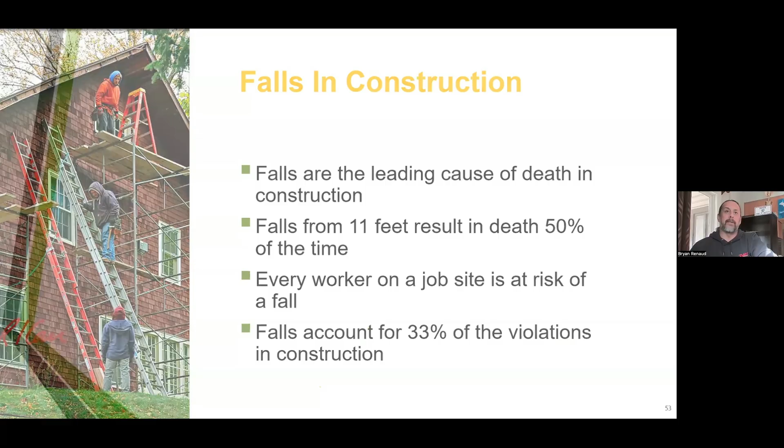Fall protection is broken up into 3 major categories: the duty to have fall protection, systems criteria, or how do you build the fall protection. Guardrails 42 inches plus or minus 3 inches, 200 pounds capable outward, downward thrust, 5,000 pounds for an anchorage for your personal fall arrest systems. You can't fall more than 6 feet. That's a duty to have fall protection.

Every circumstance, location, and work activity seems to have a different 501, or duty, or I like to call them just excuses. Because quite honestly, when they made these rules, each NAICS code decided to take up their umbrage with the static concept of having the 3 conventional methods of fall protection at 6 feet. The 3 conventional being guardrails, safety nets, personal fall arrest systems. Why? Because they keep you from hitting the ground.

A monitor doesn't do that, it just kind of warns you. A monitor is just a person standing there watching you work. A flag system isn't really comprehensively capable of stopping you from falling off a roof or any kind of surface. It's just there to warn you, 6 feet away from the edge, and if you're not a roofer, 15 feet away from the edge. Really, it's just nonsense. Just nonsense.

You might... well, I already let the horse out of the barn, or whatever you say. But I'm Canadian.

I don't think Canadians are smarter than Americans, I'm just going to put it out there since I'm in public. But anyway, they don't use all the damn excuses that we do over here. I have some suspicion it has something to do with the way they pay for the consequences, but somehow they solve the problems. Because why? The mother of all inventions is necessity. And if we make an excuse for every damn reason, you're never going to come around, you're never going to figure it out.

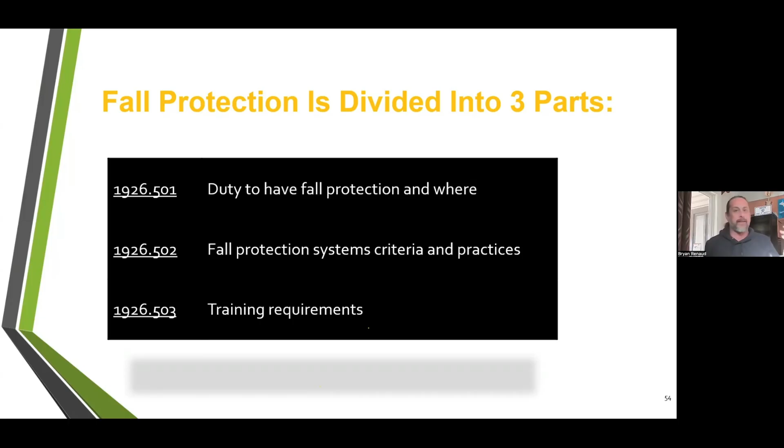Anyway, we got some really bad rules in my opinion. But at very minimum, it's at 6 feet, you got to do something. You got to do some sort of fall protection that's found in our standard. You got to make sure that all work surfaces are capable of being walked on.

This is not one picture, this is actually 2 pictures, because otherwise it looks like, what the hell am I looking at? The top picture is looking straight above at a roof, metal decking, and obviously they're replacing the metal decking, which is the course of the work anyway. It's so shot, and then somebody fell through the thing. I got an idea: how about before this job even gets going, we string a net on the bottom of the bar joist all the way around the inside of this joint?

Sound good? Yeah, but it's not conventional. In fact, if you even started to speak about safety nets to most folks, they're like, what are you talking about? Just because it's not conventional doesn't mean it doesn't suit the purpose. It just means that usually, unfortunately, in construction, we always go to the bulletproof jacket walking through an active gun range. What do I mean by that? PPE. It's the dumbest idea ever, but that's what we do in construction every damn time.

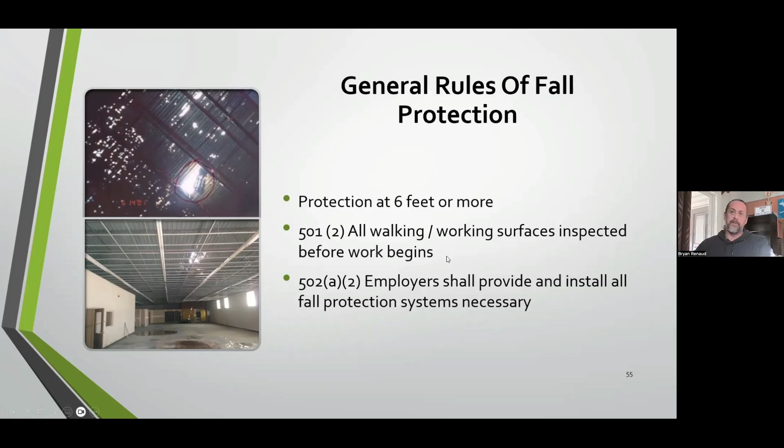Every damn time, not passive fall protection, we go to harness and lanyard. Well, you know how fallible that is? There's another one, I guess it looks like somebody fell through a skylight or a similar situation, but they're two separate pictures. Obviously the employer is obligated to provide fall protection. There's a whole bunch of different locations, or like I say, excuses.

Leading edges is not what you might think it means. Leading edges is like decking activities, or where the work progresses such that it creates the next area from where you're going to work from. The reason we deal with that as a separate issue is because you can't just put a guardrail on a leading edge, you'd be taking it down every time you go to put another piece in. So there's an exception within that paragraph of activity.

Hoist areas basically says if you take the guardrail down, then you got to put a harness and lanyard on. Holes, you got to cover them. The hole cover has to be capable of 2 times the maximum intended load. What are you planning to drive across here? Is it just pedestrians, or are there lifts? How big is the hole? Because we all know the larger the surface area, the stronger something covering that section needs to be. It might probably be better just to do it with a guardrail, depending on the size of the hole.

Formwork, reinforcing steel, really what we're talking about is vertical workplaces where you might use a positioning device in conjunction with fall arrest, because you still have to be protected from falling at greater than 6 feet. A singular positioning device is not enough, because what if you miss? I mean, it's so obvious. And obviously you can't work in fall arrest because you can't lean into it. So it needs a combination of the two systems when you're working 6 feet above on a vertical surface like that.

Excavations, I almost don't want to tell you what it says, but it basically says if you can see a wide open excavation, there's no fall protection required. That's based on the concept that you're going to be sloping it, I guess. Because if you're at the edge of a well, pit, or shaft-like structure, which is generally vertical and reinforced and doesn't move, a trench box is different because a trench box moves, which is why we don't have fall protection requirements at the top of a trench box. But if you had a big old sheet-piled hole in the road, that's an excavation. It's a pit, well, or shaft-like structure because it's reinforced, vertical, and not moving. You have to have a guardrail at the top of that excavation. Fair?

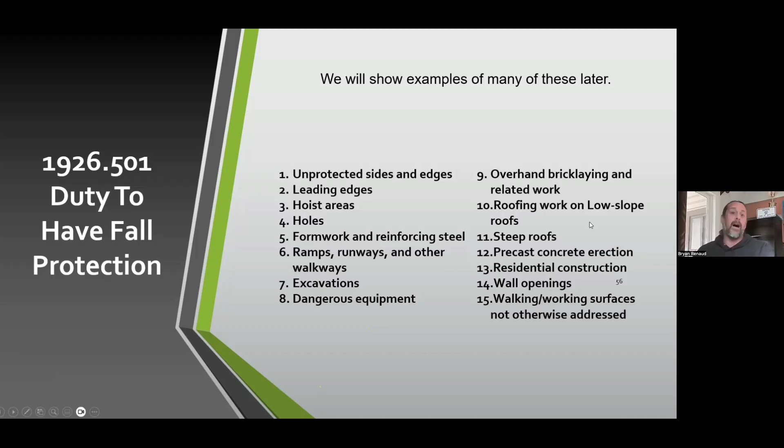I'm not trying to be a pessimist, I'm just trying to relay the fact that these rules are made for insurance adjustment purposes, literally not out of safety. Here's where you can find all the different varieties of locations and work activities and their options. I'm not going to go through them all, but I think I conveyed the gist.

Then we have, for protecting a side and edge, three options. What are you going to use? Are you going to put everybody in a harness and lanyard when they come to this small location, or are you going to put up a guardrail? You could extend a safety net if you wanted to.

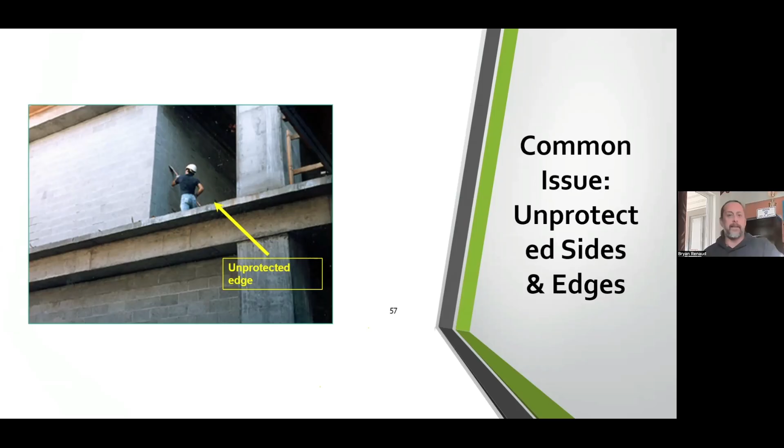It'll be a little odd, but it might not be odd if this was a hoist area. I've seen that used many times in a hoist area, where they'll have an extending net outside the building, so they don't have to have fall protection while receiving loads at the hoist area because they have a net underneath them. It's just like the net on the exterior of an aircraft carrier - you don't work in it, you fall in it, and then you climb the hell out back on deck.

Different ways - holes, you've got to have adequate covers. I often say this guy here died of smoking, because the boss was over this way and told him, 'Hey kid, go get a couple rolls of this tar paper.' On his way back he's thinking, 'Man, I'd like to have a cigarette. If I go back there he's going to put me to work, so I'm going to put this stuff down, get cigarettes out of the top of my hard hat, and sit down to have a cigarette.' And then he falls through the skylight. See, smoking kills.

I have no idea, but it seems relevant - I don't know, it looks like it could have happened. Either way, skylights are not designed to withstand twice the intended forces, like a human body landing on them. Covers have to be secured against accidental displacement.

Sometimes sheer weight works, sometimes you have to secure it with fasteners. If you have a small hole you could just step into or trip into - say it's 14 inches by 10 inches - maybe you make an 18-inch square oversized cover. If you didn't want to damage the surface, you put a 2x2, about 14 inches long, and screw it onto the plywood, so the 2x2 is sticking in the hole along with the oversized cover. So it's sloppy, but it works.

It's protected against accidental displacement, because if you kick it, the 2x2 is going to keep it in the hole. You might even be able to kick it up a little bit, but you'll never expose the hole. The only additional thing you have to do is mark it as a hole or a cover so that nobody comes around looking for a piece of plywood and takes it.

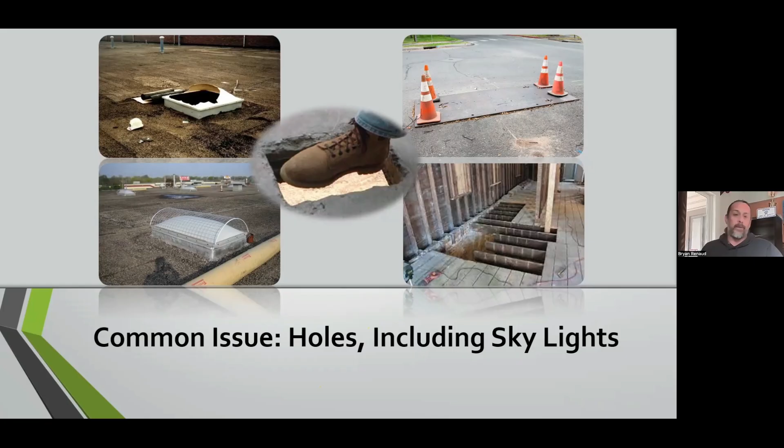Because it's a precast construction, the HVAC guys had already delivered all their materials to the job and saw all these damn holes and said, 'We can't walk away from these holes.' So they flipped their hoods upside down in these holes, did other things to fill in the holes, thinking they were going to do a good thing, when the kid picked up a hood and walked into the hole because it wasn't identified as a cover or a hole. It wasn't secured. And what a damn shame.

Residential construction poses a lot of issues. I would suggest modular installations like we do in commercial and industrial work would go a long way for these guys putting up bar joists or trusses. But the same thing gets done with bar joists. You put a whole bunch of them together, get all the bracing in, pick it all up at once to avoid a lot of exposure to the heights.

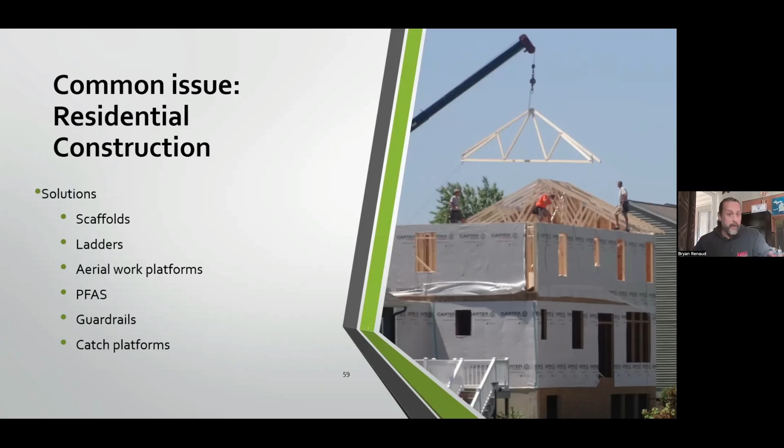Having guys with their skivvies to the backside on the top of an exterior top plate, that's not good. It's not adequate. They do have an option of using what we call a plan, but they have to prove why it's infeasible or creates a greater hazard to use conventional methods before they get into the concept of a plan.

This is a nice little picture showing the guardrails go up with the first floor walls to provide fall protection for the second floor before you even rolled in a floor joist. They can also act as a kicker for the guardrail, or a kicker for the wall when you go to stand it up. Certainly remove them, put them on the next wall.

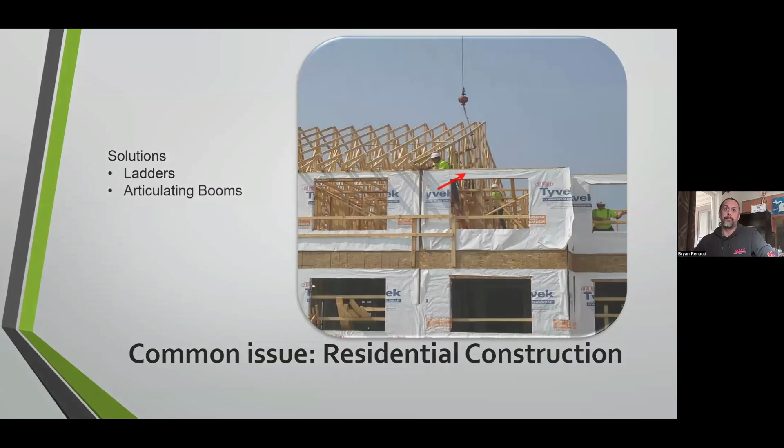They did suggest ladders as a solution. I don't ever like to suggest ladders as a solution, especially when we're talking about a work platform. Just because there's no fall protection requirements on a ladder, crazy, right? Well, if you did, believe me, Werner and Louisville wouldn't be too pleased. But anyway, in Canada, ladders are pretty much outlawed. Their threshold's 10 foot though in Canada, so at least they got ladders for a little bit. But this job's probably in California, because I've never seen anything like this around here.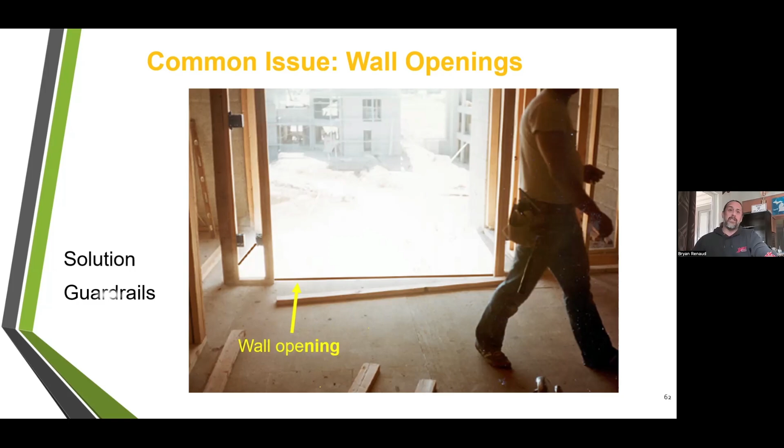Wall openings or window openings, by definition, is 30 inches tall by 18 inches wide with a sill not as high as 39 inches. 39 inches is the bottom height of a guardrail because it's 42 plus or minus 3. So 18 inches wide by 30 inches tall is a wall opening. Does that include 16 inch on center studs? No, but if you're working in a green build and they're going 24 inches on center, those stud voids all of a sudden become wall openings and would require guardrails. So interesting, going to a 2x6 and a 2-foot gap all of a sudden poses fall protection issues, potentially, especially with the bedroom that might be over the foyer. However, that's probably not a green wall anyway, so I don't know. But just kind of point out what a wall opening is.

And then there's a bunch of different protections.

The conventional methods are guardrail, safety nets, personal fall arrest systems, and hole covers. And then there are other systems that are only used under certain circumstances in certain environments.

Top rails should be 42 inches plus or minus 3 inches. Mid rails, you put them halfway in. Toe boards, do you need them?

Well, if there's people working below and there's any kind of objects that could potentially be on the floor where you're at, then yes. Is that 100%? Well, pretty much, but I can't say that. It doesn't say that in the rules, but pretty much yes, unless you barricade the area below so that nobody can be down there. That's another option.

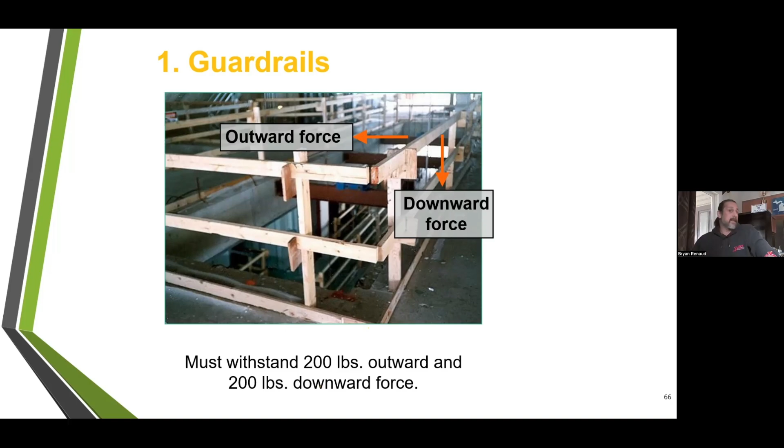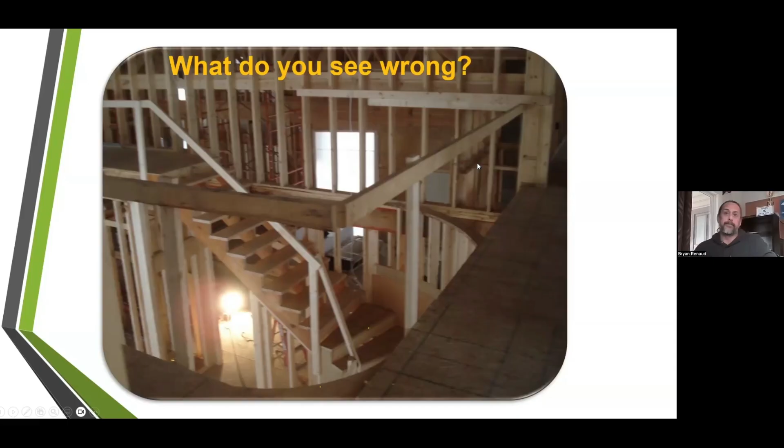200 pounds outward downward force. In order to assure that the 2x4 is capable of 200 pounds outward downward force, we can't span more than 8 foot on center. Got to be secured, of course.

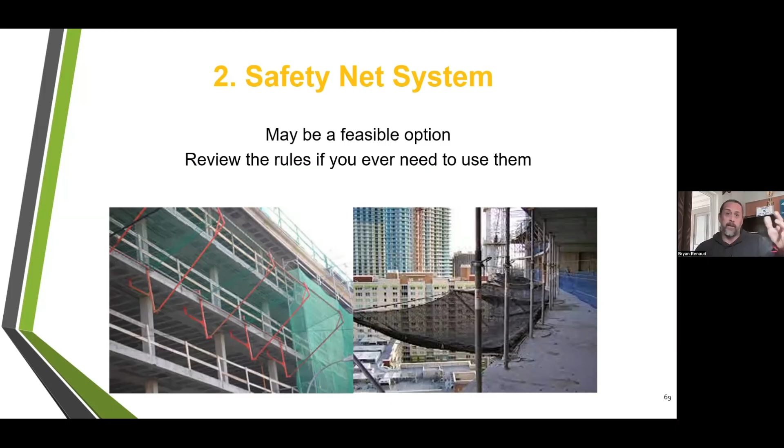These are some of the nets as they might extend from the deck, which is pretty cool. Kind of gets the guardrails out of the way. Different technique. I actually went to the Philippines a couple of years ago and found that they use this by and large. They don't use guardrails like we do.

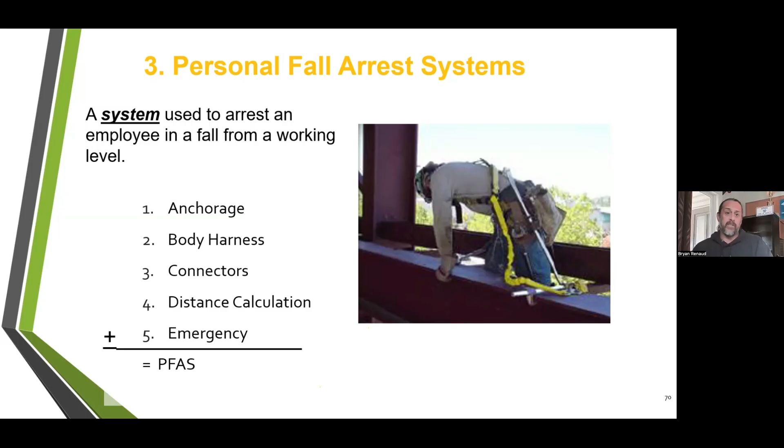You're only as good as your weakest link, so ensure that all parts are capable of either 5,000 pounds or twice the intended load as designed by a qualified person. Typically these systems, a 6-foot static lanyard with shock absorber in it, is going to reduce, as long as you don't have greater than a 6-foot free fall, the forces to 900 pounds. So twice 900 is 1,800. That's a lot easier to come up with than 5,000 pounds sometimes.

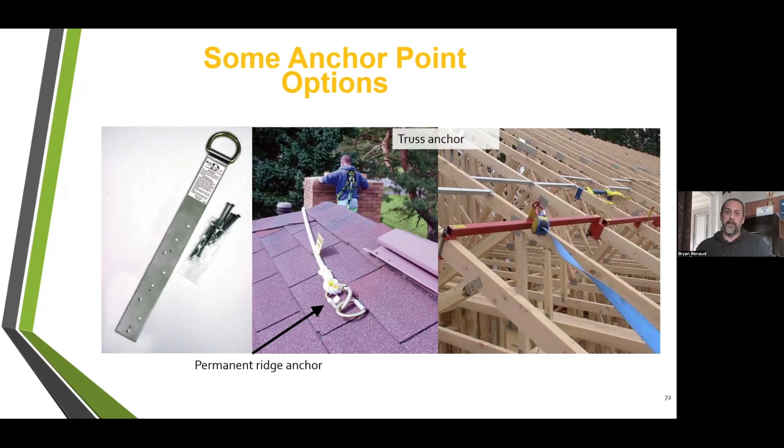Can't really tie back on your lanyards unless it's designed for it, which all the lanyards are designed anymore with the larger triangular type snap hooks.

I know I'm about at time here. I just want to say you're going to want to make sure your harnesses and lanyards are tight, secure. They might feel uncomfortable. I'll tell you, it's a lot more uncomfortable when they come up really fast. I had a guy tell me about that one time.

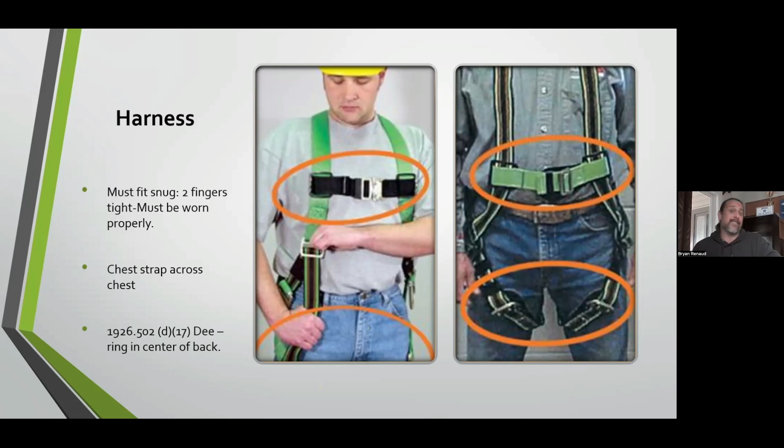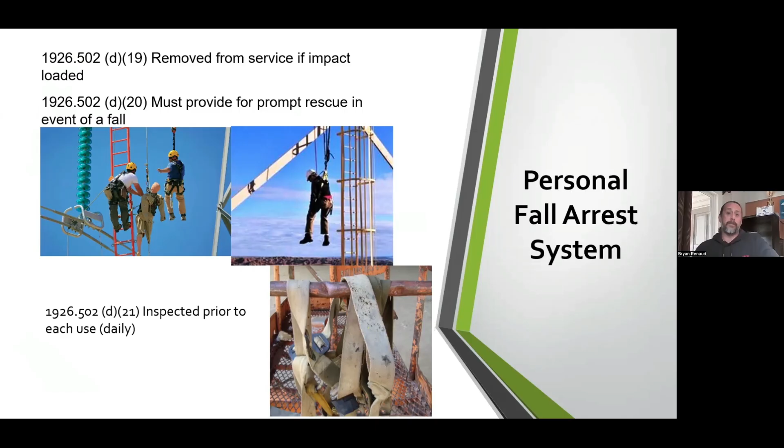Obviously, you want to have everything in proper working order, inspected. Very important to have a rescue plan because it will cause suspension trauma, which will kill you in apparently less than 15 minutes, maybe even less than 10 minutes if you are suspended in a harness because of the way the leg straps press in on your femoral artery, stopping your circulatory system flow.

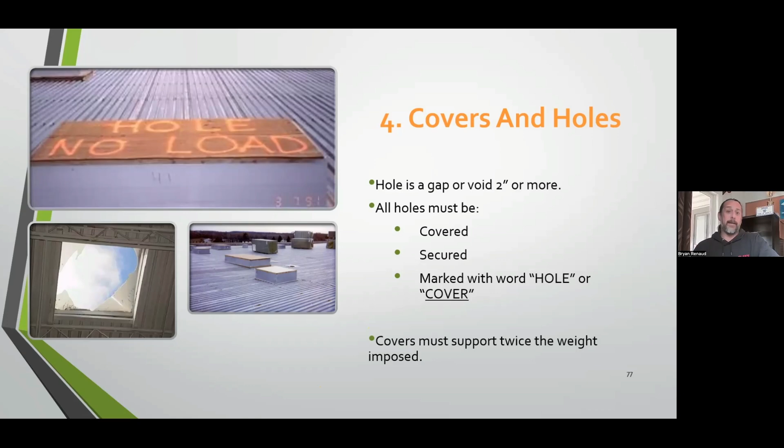Here's what I was saying earlier. You got to be covered, secured, and marked as such. A hole is as small as 2 inches in its least dimension. Some people call that a gap, but we'll call it a hole for our purposes.

I do not want to keep you any further. I think I spoke about the critical parts of a guardrail, which is a 200 pounds outward downward thrust, and the height of the guardrail, 42 inches plus or minus 3 inches. Those are the critical points of a guardrail system. The 5,000 pound capability of a harness and personal fall arrest system, as well as the concept I didn't mention but shall now, the amount of distance that the fall is going to take to arrest using personal fall arrest systems, usually almost 20 feet. So personal fall arrest systems are actually really more designed to be used at great height.

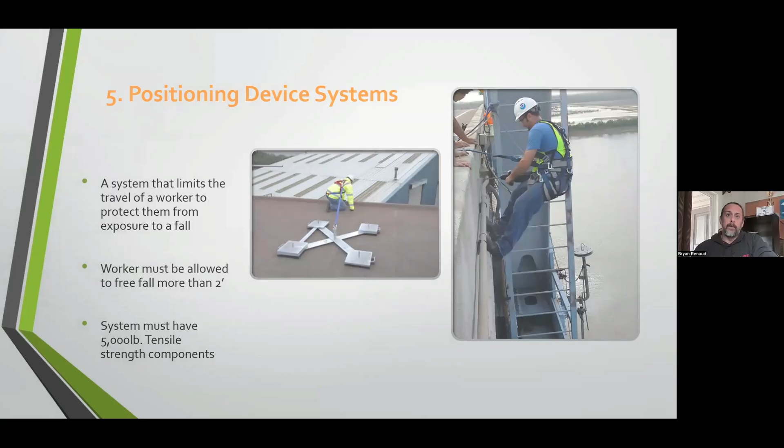Safety net system, that's another one of the conventional systems. Otherwise, other positioning devices and other flagging systems that you might see with roofers are optional.